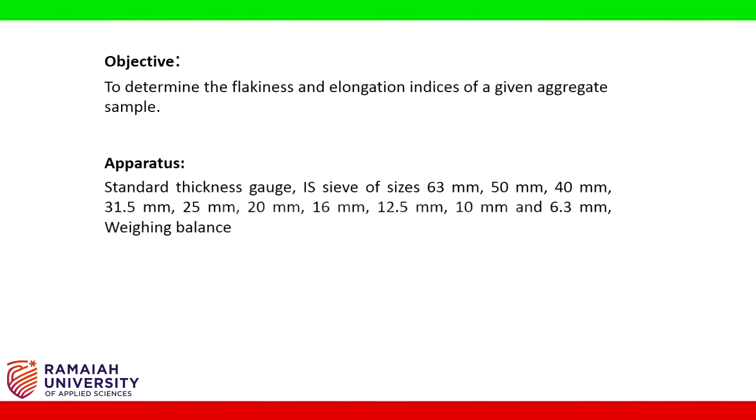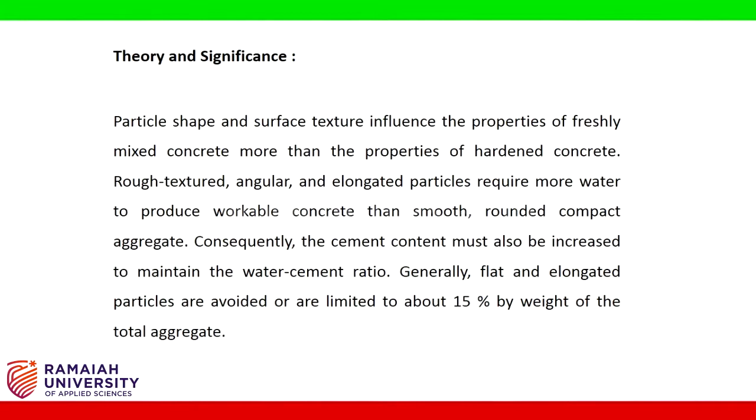Particle shape and surface texture influence the properties of freshly mixed concrete more than the properties of hardened concrete. Rough textured, angular and elongated particles require more water to produce workable concrete than smooth, rounded, compact aggregate. Consequently, the cement content must also be increased to maintain the water-cement ratio. Generally, flat and elongated particles are avoided or are limited to about 15% by weight of the total aggregate.

Procedure: Flakiness index. Take some aggregates and sieve them properly through the sieve set 63 mm to 6.3 mm in descending order. The taken quantity must be sufficient to provide minimum 200 sieved pieces for test. Separate the aggregates by their sizes and find the weight of aggregate of each size. Try to pass each aggregate through the corresponding slot in the thickness gauge. Weigh all the pieces which pass through the particular slot.

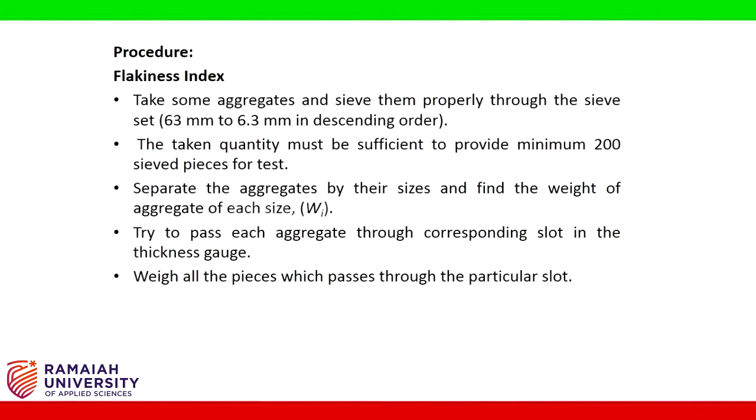Elongation index. Sieve the aggregates through the sieve set and determine the weight of aggregates of each size separately. Try to pass each piece through the corresponding gauge size. Weigh all the material retained by the length gauge.

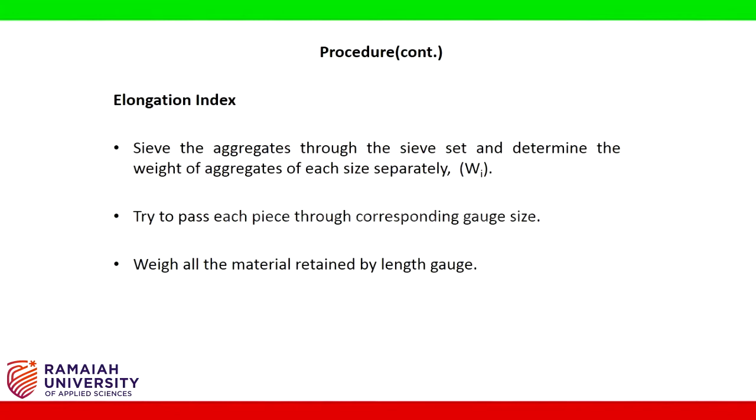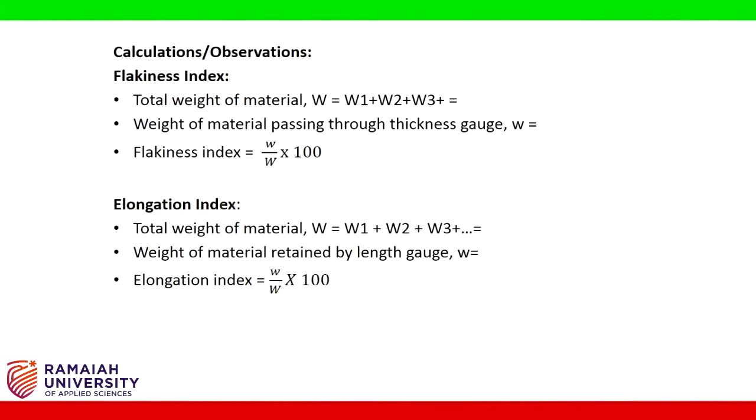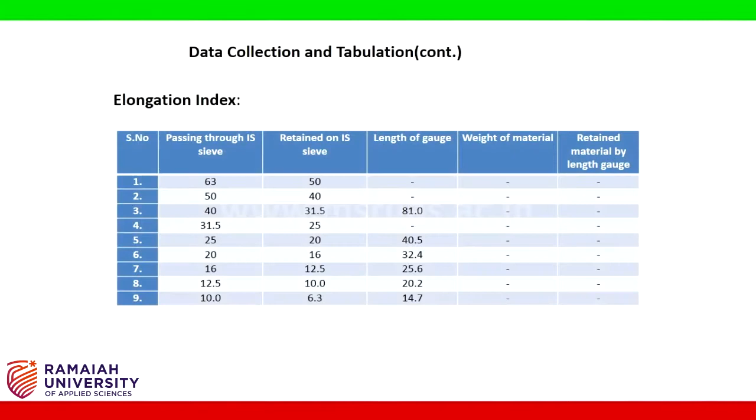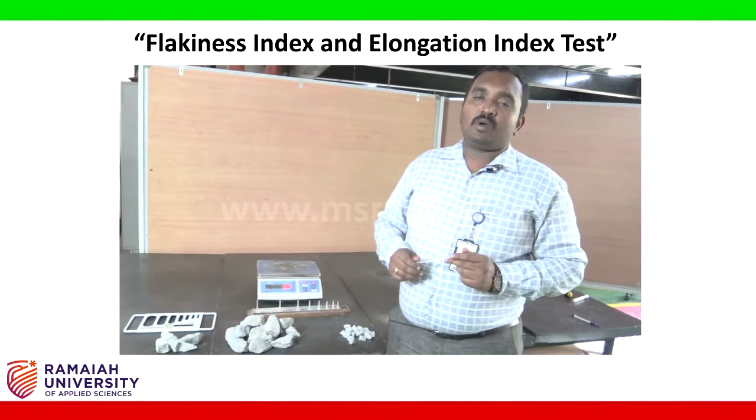Hi students, as a part of Concrete and Highway Laboratory, now we are doing an experiment on flakiness as well as elongation index of the aggregate. So you know the different shapes of the aggregates. We classify the shapes of aggregates into four forms. One we call rounded aggregates. Second one we call cubical or angular aggregates. The third one we call flaky aggregate, and the fourth one we call elongated aggregate. What do you mean by rounded aggregate?

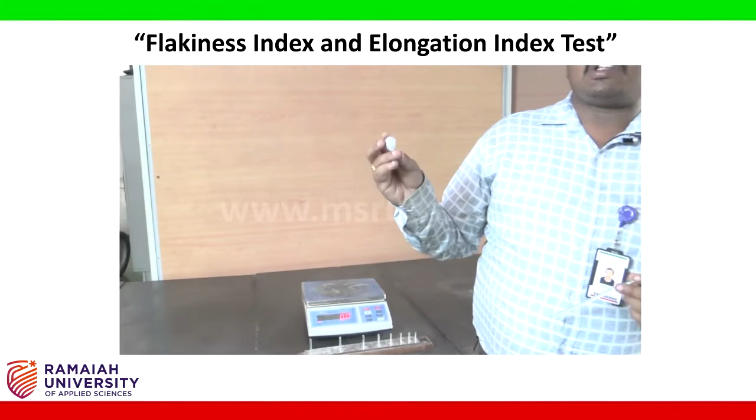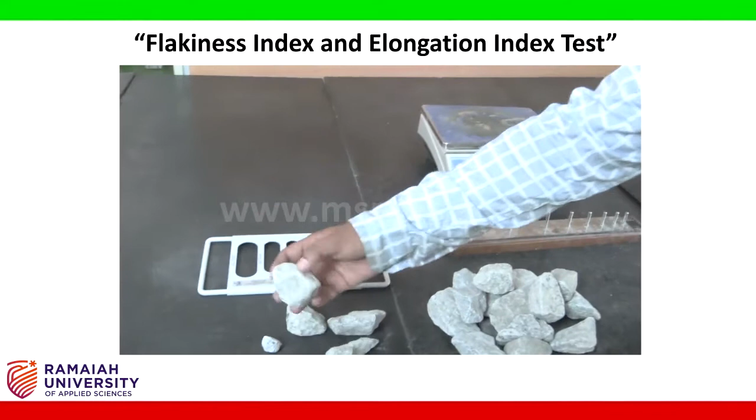If you simply observe the aggregate, the complete spherical area appears to be rounded. So this is what we call a rounded aggregate. In a rounded aggregate you get good workability; the workability will be more. Whereas the strength of this rounded aggregate, as there is no interlocking property, will have a little variation. The second type is the cubical aggregate. It has corners, the cubical corners. So it gives you good workability as well as good strength because of the interlocking properties.

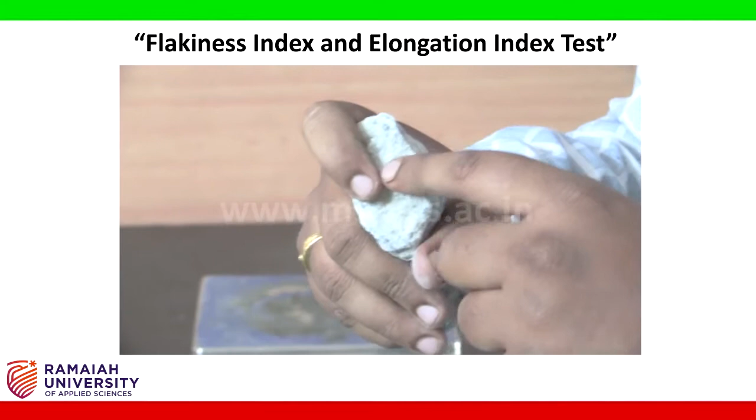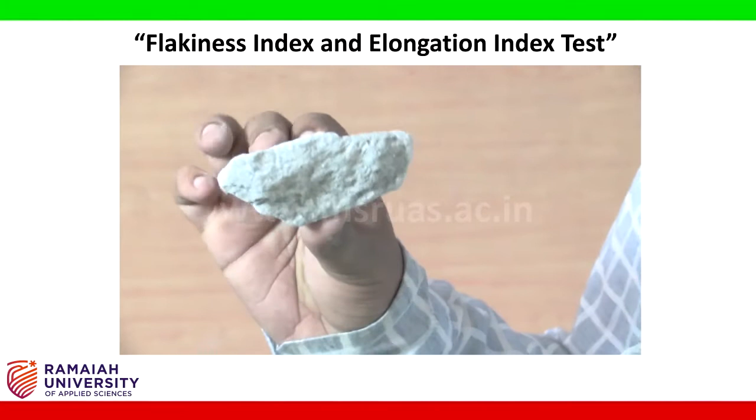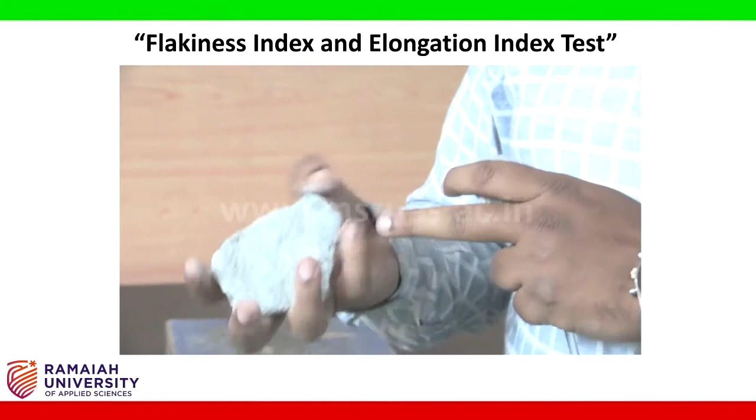The next two things we are talking about today are the elongated aggregate as well as the flaky aggregate. What is this elongated aggregate? The length of the aggregate is more than the other dimensions; we call it an elongated aggregate. What is flakiness? The surface area will be more and the thickness of the specimen will be less. This is what we call a flaky aggregate.

So let us start doing the experiment. Before doing the experiment, let us go over the apparatus required. The apparatus required is the standard IS sieves ranging from 63 mm till 6.3 mm.

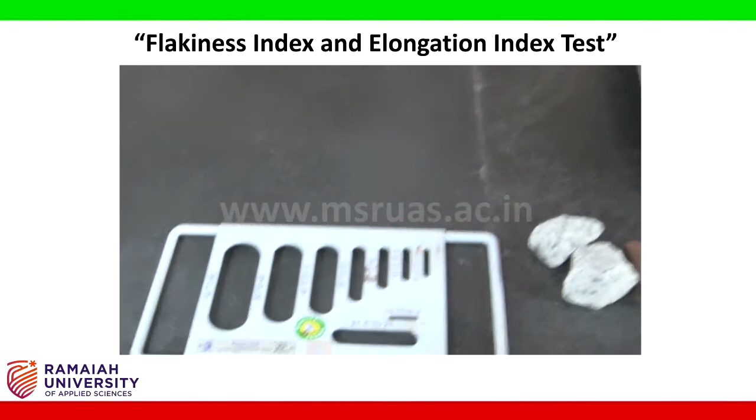What we are going to do is, we are going to collect 200 sample pieces in each of this category. Like 63 to 50, I am going to collect 200 pieces. 50 to 40, I am going to collect 200 pieces. Next, till 10 to 6.3, I am going to collect 200 pieces of aggregates. Okay, so after collecting it, I am supposed to get it tested.

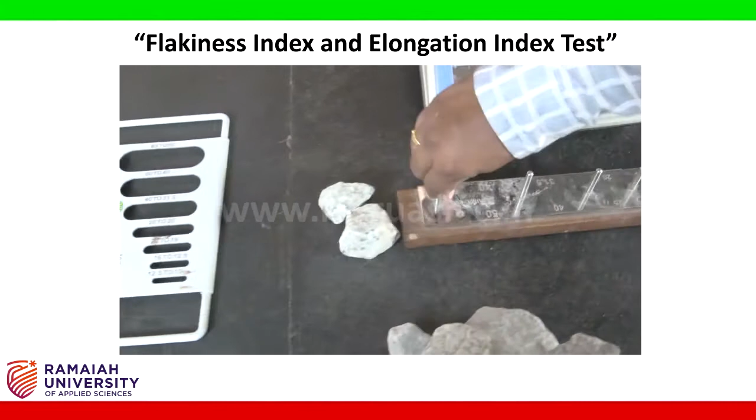So I require a thickness gauge. This is what we call a thickness gauge, which is used to do the flakiness index test. This is what we call a length gauge. This is the length gauge, which is used to perform the elongation index of aggregates. Also, we require a weigh balance to measure the samples. Now let's start the experiment.

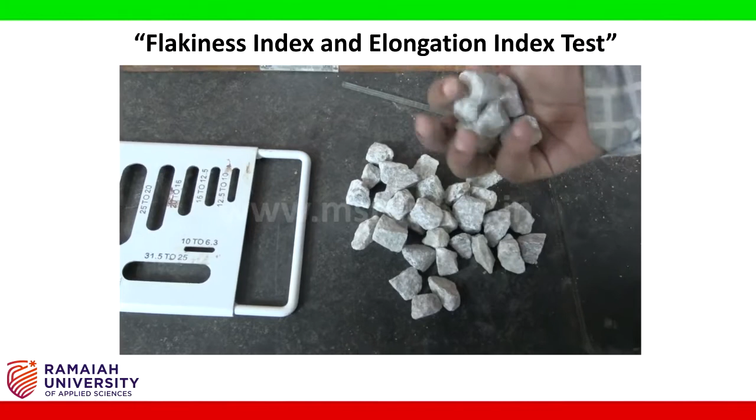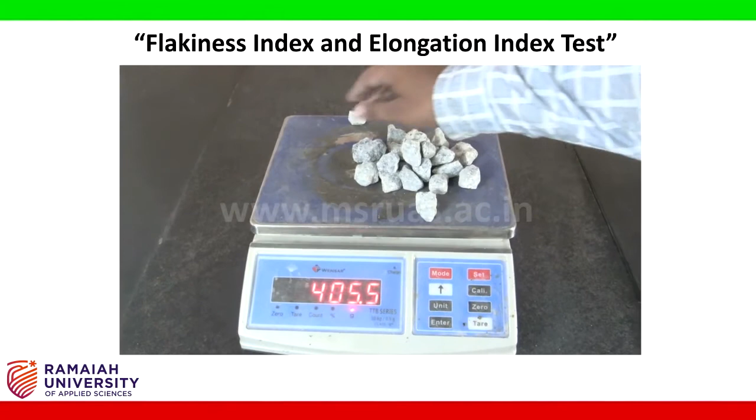I collected 25 pieces of aggregate which are passing 25 mm and retained on 20 mm. I am going to weigh the total weight of the sample which is collected, 25 pieces. So I weighed the 25 sample pieces. Why I have taken 25 instead of 200 is just for the laboratory's sake. Actually, as per standards, we need to do it for 200 samples. Note down this weight, the weight of the 25 pieces passing 25 mm and retained on 20 mm. I am going to keep it on one side.

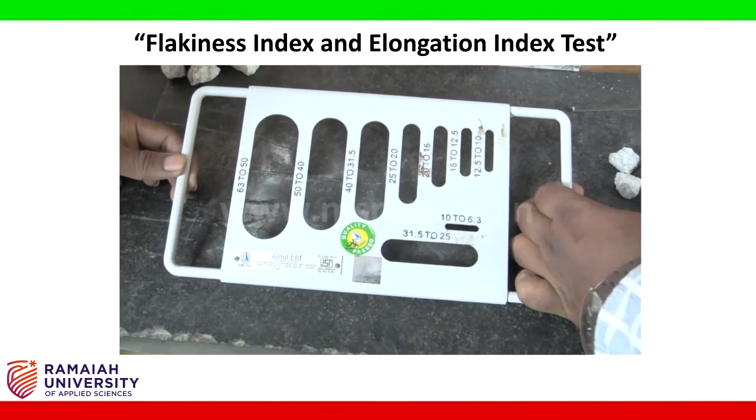What I am going to do is, I take one aggregate at a time. I am going to take this thickness gauge. I try to pass the aggregate in the concerned slot, the 25 to 20 mm slot on the thickness side. What happens? Some aggregates pass, some don't. Keep on one side whichever aggregates are passing. So this is not passing. So this one is passed. I am going to keep this particular specimen aside. Whichever is going to pass, I keep on one side. Whichever is not going to pass, I keep on the other side.

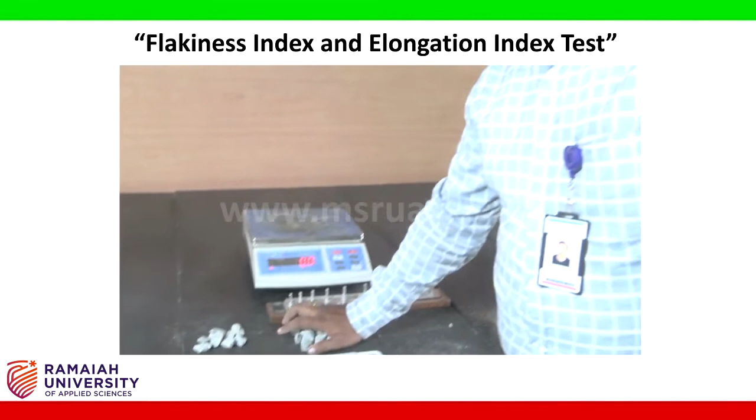After segregating, I am going to take the weight of aggregate which is passing the thickness gauge. I will note down the weight of aggregate which is passing the thickness gauge. The ratio of weight of aggregate passing the thickness gauge to the weight of aggregate taken gives you the flakiness index for that particular set of sieve.

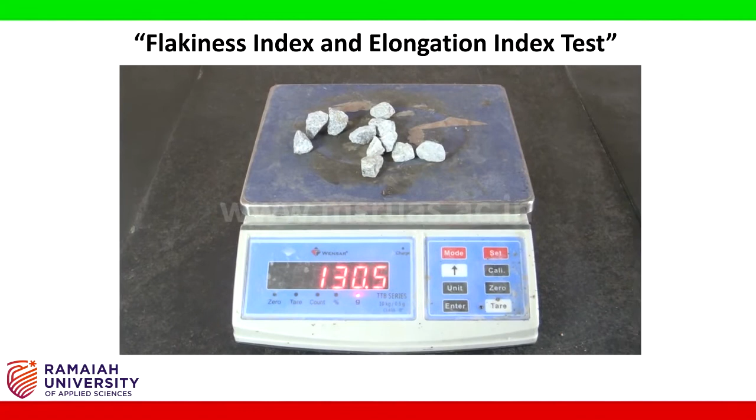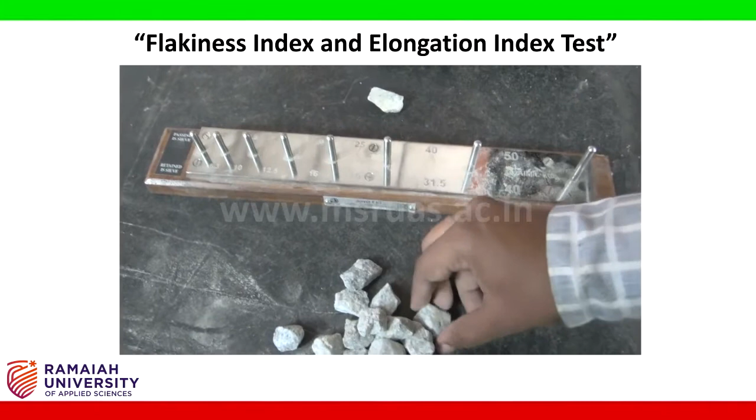After doing the flakiness index test, the same 25 samples of aggregate we are going to pass in the length gauge along the length axis like this. So it's passing, this is also passing, this is also passing, also passing, this is also passing. I'll just segregate the aggregates which are passing and not passing. Almost all the aggregates are passing.

So I am going to take the weight of aggregate which is not passing that particular set. The ratio of weight of aggregate not passing the length gauge to the weight of aggregate taken gives you the elongation index. This completes the tests on aggregates, particularly for elongation as well as flakiness properties.